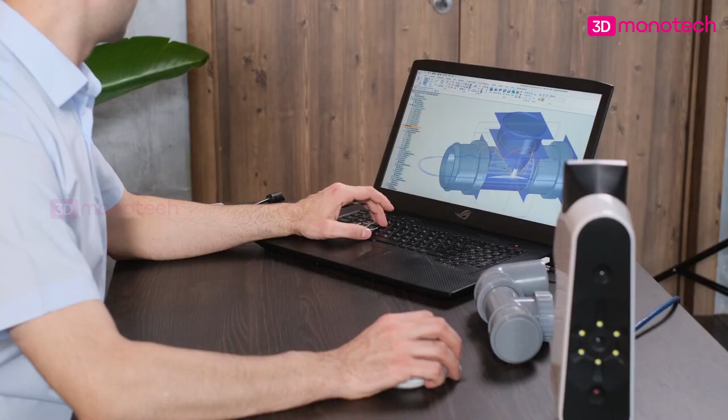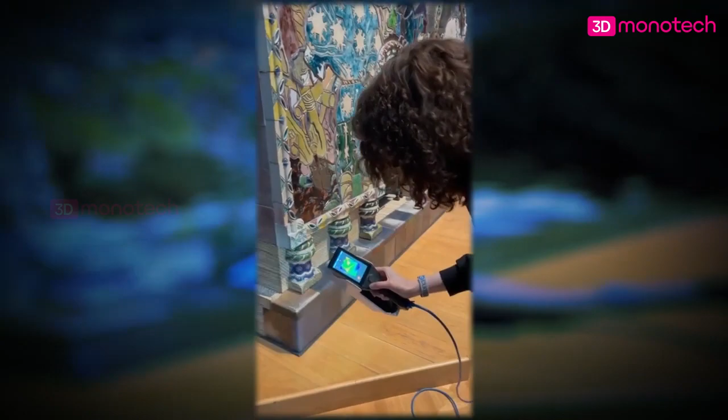Calibry 3D scanners are used in a wide range of applications, from art and medicine to reverse engineering. The built-in screen makes it easy to scan objects even in challenging environments. And patented algorithms produce a dense point cloud.

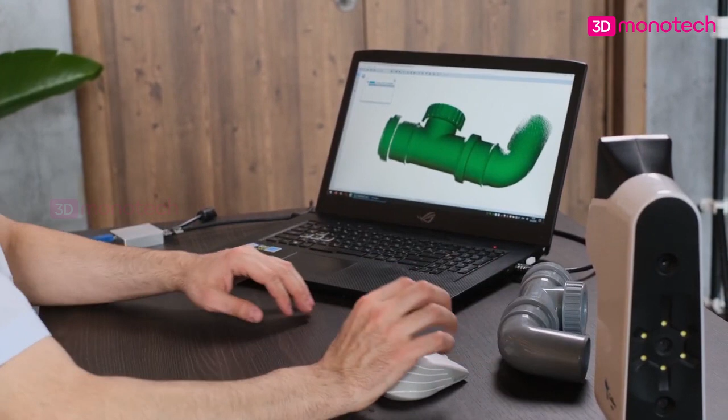Calibry Nest software, which is used for processing scan data and editing polygonal models, offers the users a wide range of tools to satisfy even the most demanding professionals. In this video, we will tell you about one of these tools, which in our opinion makes it much easier to process models both for final use and for later application in printing or reverse engineering.

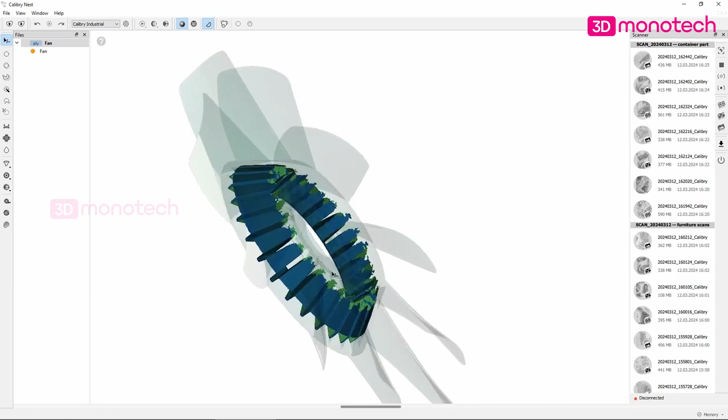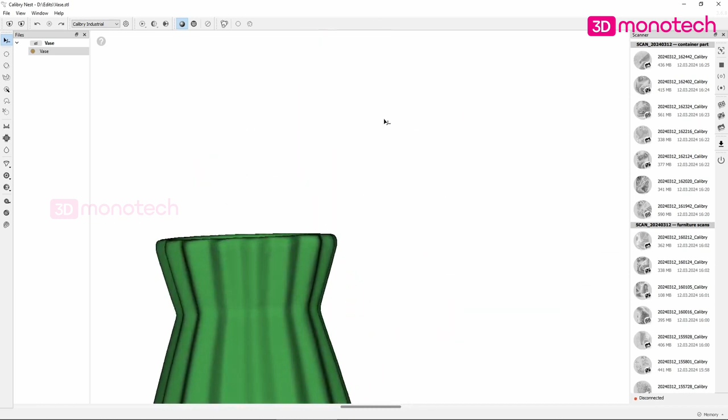This tool is Hide Selected. Let's see how it works and how to use this tool competently on 3 examples. So let's start from the very basic sample. Here we have an excellent scan of a vase. We are not satisfied with the polygonal mesh inside the vase, which turned out to be uneven. We want to cut off this extra data.

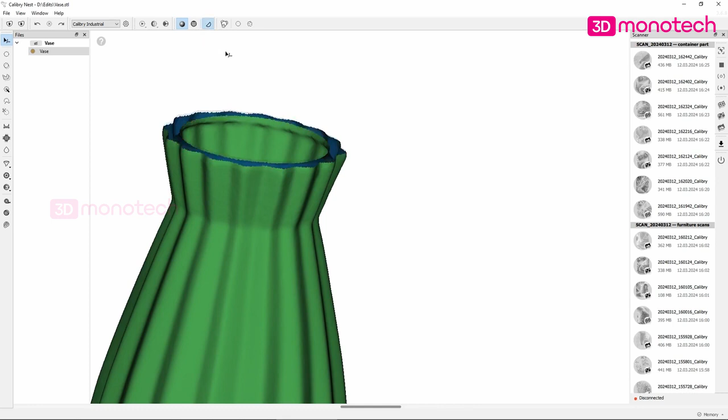To get better access to the surfaces inside the vase, we need to select the outer parts of the model and hide them. In this case, it is easiest to hide the neck of the vase first, after which the outer part will no longer touch the inner part and it will be easy to select it with a magic wand and hide it too. That's good. This way we get access to hard-to-reach surfaces that can be edited. Now we can evenly trim the inner edge of the vase neck, thus giving our model a neater look.

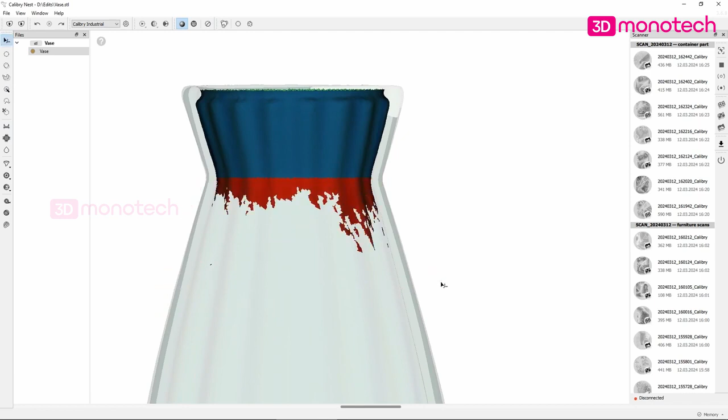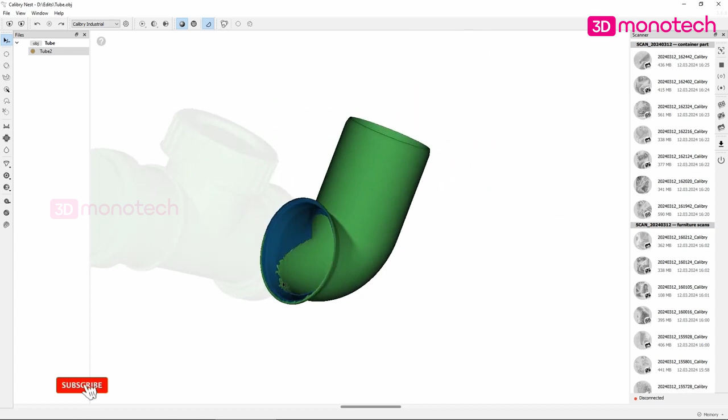The L-shaped pipe is a bit more difficult than the vase, as the uneven edge of the scan is deep inside and almost at the joint. As shown earlier, hiding can be done in stages. It's best to start by simply selecting parts that we don't need and don't want to affect during editing.

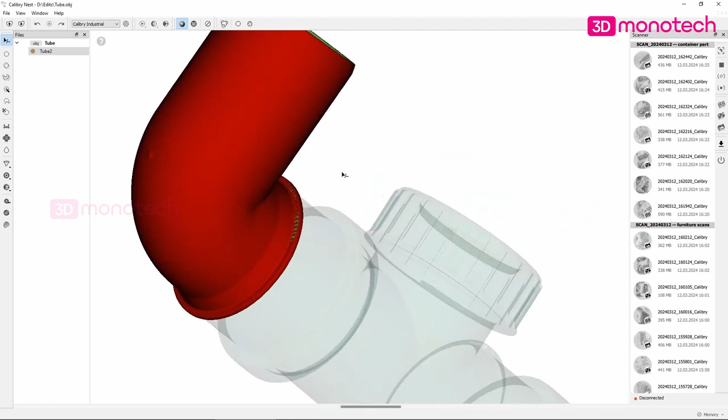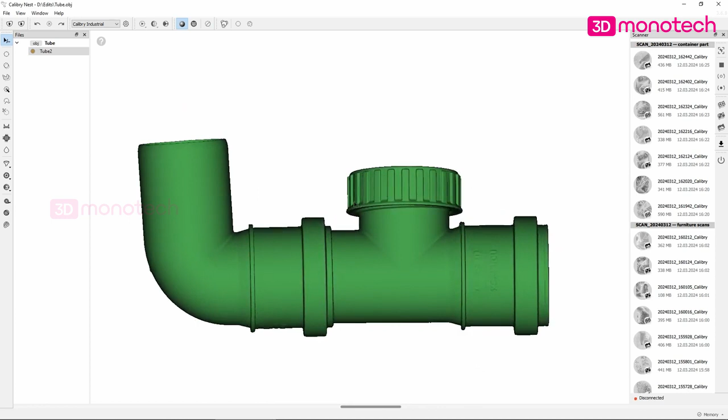You could use a one-sided marquee brush to gradually highlight the surfaces you want to hide. Unfortunately, on some models, this can be laborious and time-consuming. In addition, some parts may be inadvertently under-selected and damaged during editing. Instead, it's possible to separate the hidden and editable surfaces by hiding one of them. It's best to do so.

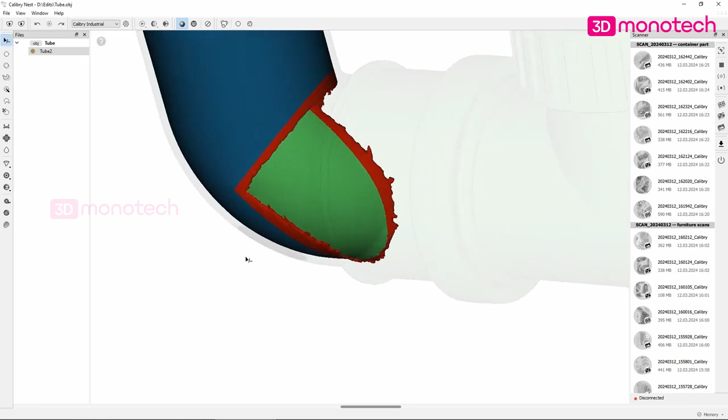After making sure that the outer areas are hidden, select the rough edges and press Delete. If nothing is selected on the model, the button Hide Selected changes its shape and function to Show Hidden. Click it and all hidden surfaces will be shown again, like this.

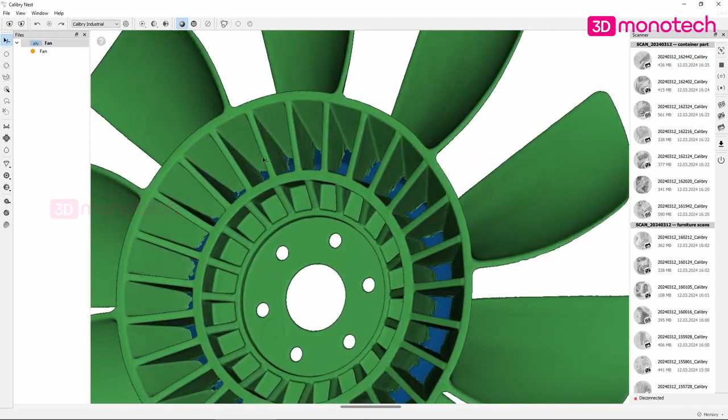In the third example, we need to edit out some rough edges inside the fan sockets. But how to get access to these internal areas of the model? As we've shown previously, it can be done by hiding parts of the object step by step until the rough mesh is exposed. First of all, let's hide the fan blades and the outer rim.

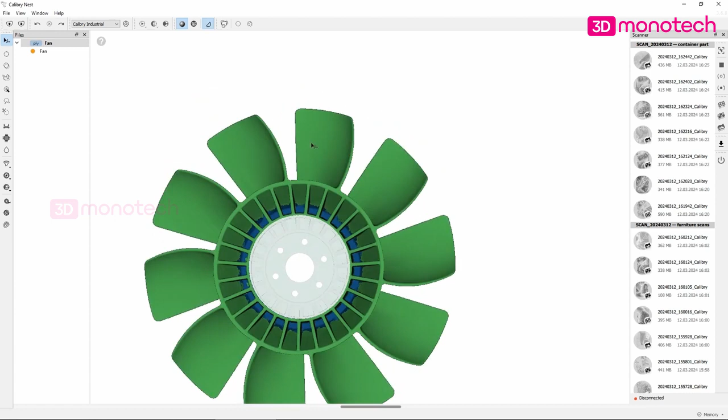The easiest way to do so is by selecting the whole fan using any selection tool, and then deselecting the central part with a double-sided brush while holding the Control key. Great! Selected areas can now be hidden by pressing the Hide Selected button. Now let's select the inner area of the central part using a double-sided brush and then hide it as well.

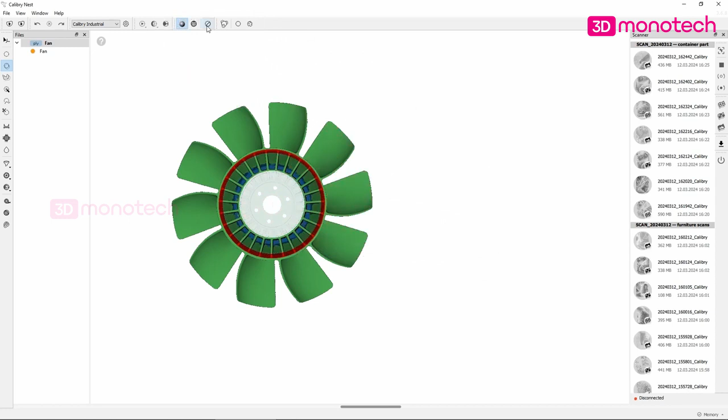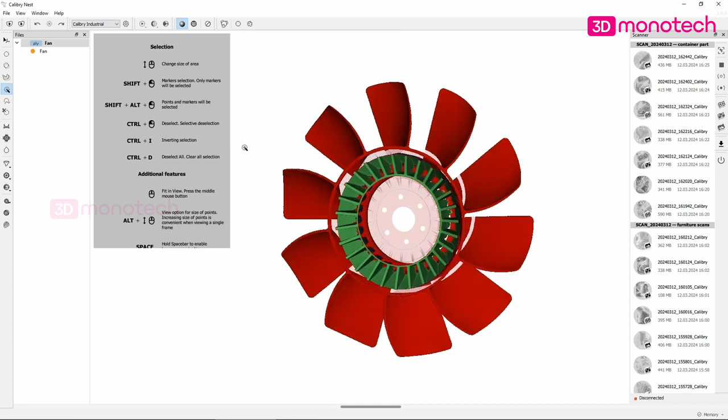As you can see, the upper surface of the fan is now separated from the base. They are not touching each other, which is exactly what we need. Now we can use the magic wand to easily select the upper surface and then hide it too, thus gaining access to the uneven edges. All we need to do now is to select rough areas with the lasso tool and hit Delete to remove them.

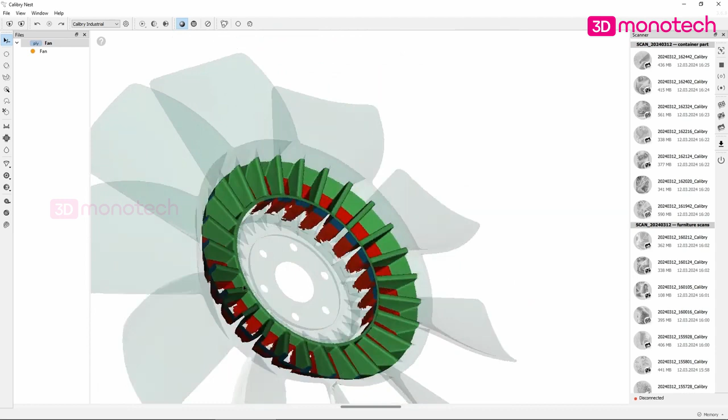After that, the hidden areas can be shown again by using the same Hide Selected button. If nothing is selected, the button changes its name to Show Hidden. With Calibry 3D scanners and the accompanying Calibry Nest software, you can solve a wide array of challenging situations.